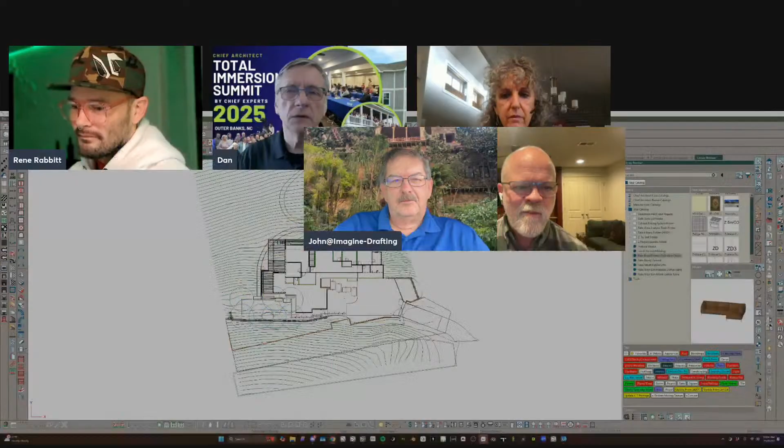There's a win, and that's it. He's really, the ROI he got from that summit was phenomenal. So Doug, if you're on the call, congratulations, and look forward to seeing you again because you're going to be there again this year.

That's still fabulous. We communicate with a lot of the people that we meet too. I mean, the networking part can't be undersold. It's awesome. You get to know like-minded people.

I'm actually doing a project in Connecticut and Laura is helping me. Laura Devlin lives in Boston. She has a cabinet line and she's going to help me on a project in Connecticut, which is really fabulous. There's plenty of room for everybody, it's fun to collaborate. I love collaborative design.

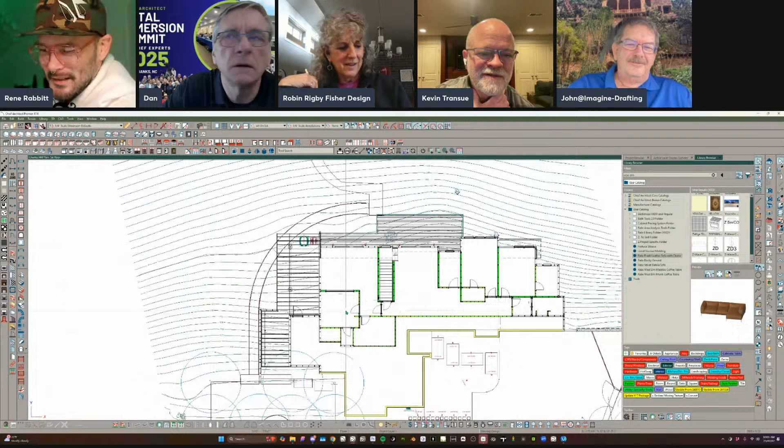Speaking of design, look at this disaster. I can't even see, this is awful. I think it's mine. I think I'm very sensitive nowadays to too many lines on the screen, which is ironic considering my toolbars are ridiculous. But yeah, I can't even see when I see something like this.

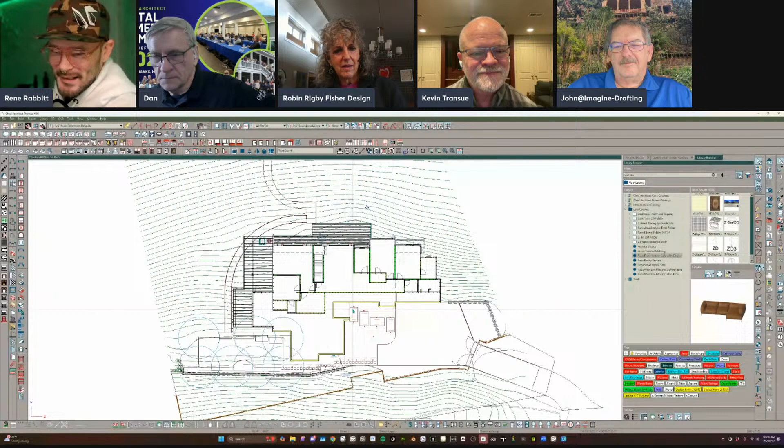This was something that was done back in 2013, and we needed some plans to do some plan review today. I figured, okay, let me go dig up an old project. If I open this up, I'd be like, oh, all right, price just went up. This looks like a pain in the butt to manage.

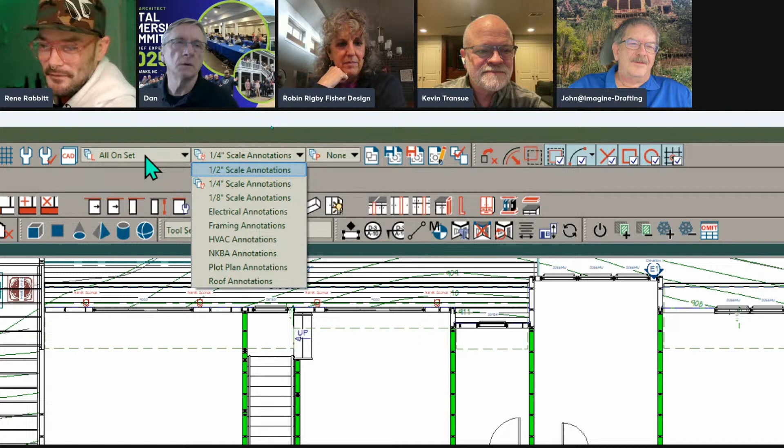Clearly, it's still probably more amazing than I think. It's actually pretty blasted on the interior side. We can see that this was before saved plan views were ever introduced, but we did have annotations, and back then I did not know how to modify my annotation sets, which are now default sets. So this wouldn't even be the right name.

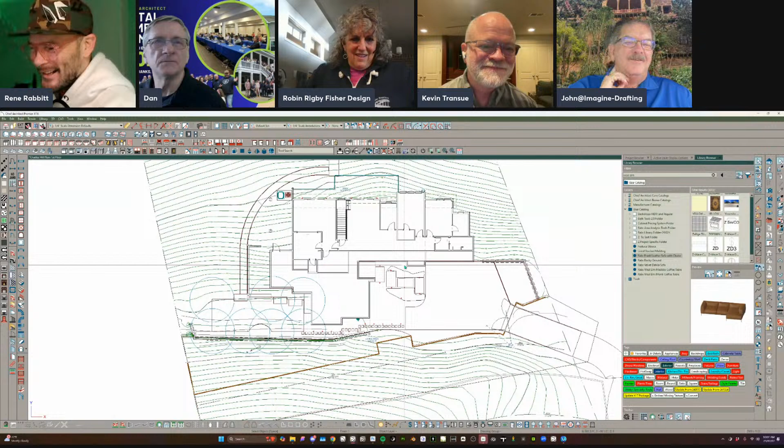Oh my, it just goes to show we've all started from various backgrounds as well. Wow, junior looking setup here. Let's see if just the default set shows anything decent. No, the default set just looks like the all-on set. So it's not great, this is so bad, in fact, that my first thought would be, let me take this and bring it into my current template plan, right?

Yeah, absolutely, that's my first thought. I'll show you how to do that because it's pretty quick. Now, transferring to my template plan is a little more challenging because I got a lot of stuff happening behind the scenes, so that's more challenging. Probably not going to get into that, but I'm going to use the edit area tool and get this all lined up. Something I like is I like to know on my template, whatever template you're using, I want to know what the center of the drawing sheet is, because if I'm going to transfer something to this template, I want to move my base model to the center of where my drawing is going to be on my new one. There's a very specific reason why, and I'll show you.

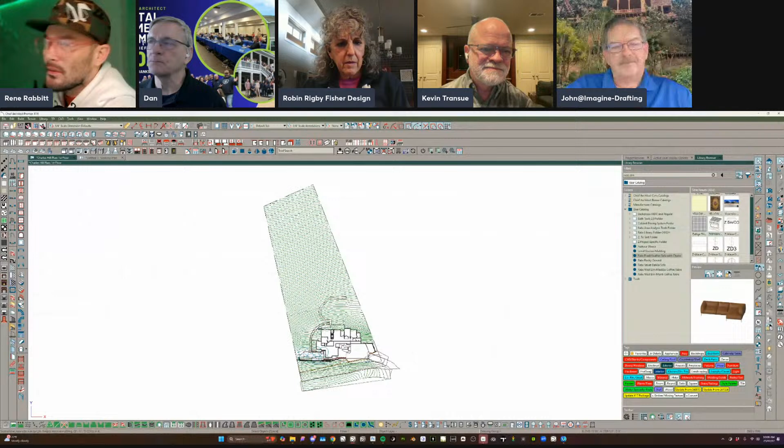We'll just do a little test of this. I'm going to use the edit area tool, which is in your edit menu dropdown, edit area. I'm going to do all visible — no, I'm going to do just edit area. We've gone over this before, but all visible just means anything that's visible on the screen, what layers are turned on, everything visible on just that floor. Edit area, all floors, makes sure that we're just grabbing every single floor, everything we've got, and edit area all floors visible. Edit area is just your current floor. So I'm going to do edit area, all floors, and grab this guy.

This will pop up and it'll take a second because this actually has a lot going on in it. I'm going to do — what the heck is this? I've never seen this before. Allowed angles, have you ever seen that before? I've never seen that. I learn stuff in Chief every day. What is that? What is it? I have no idea. Allowed angles? Oh, angles, I know what it is — you get to set your increments.

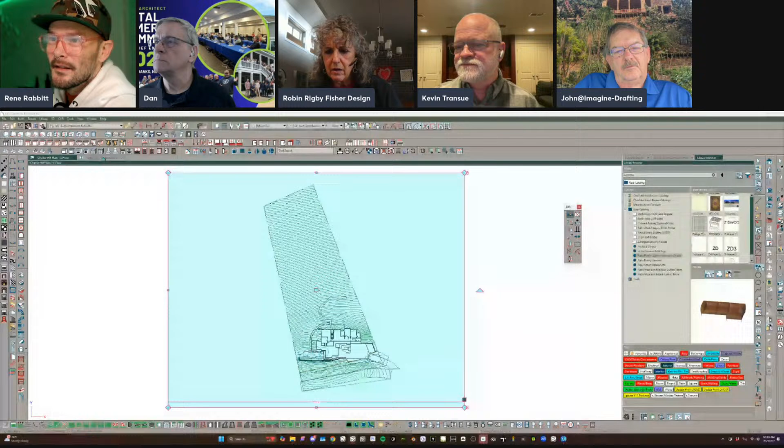So I'm using edit area. I'm going to grab this - again, it's got a lot going on here so it's going to lag a little bit. And then I'm going to copy paste, and I'm going to come back over to my template as soon as it's done copying. I guess I could have picked a project that didn't have so much of whatever is slowing it down. There it goes.

And then I'm going to paste hold position. Now you could click place, that's a way of doing this as well. My main problem with paste hold position - I like to paste hold position so that if for some reason I needed to modify the source plan, if I copy that modification over and paste hold, I know it will get pasted in the correct place.

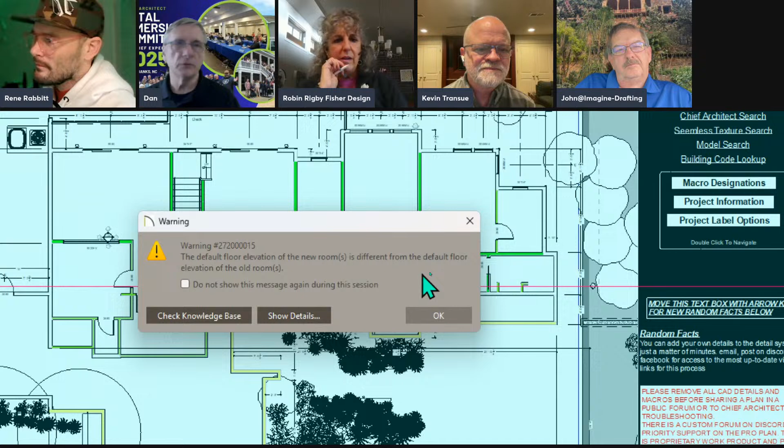A lot of times I'll mark something on my new plan that I'm going to work in and put it over in the other plan, like mark the center. Then I'll move that plan to the center. Then I'll do that edit area copy paste to the new plan. That way they're both in the same synced location. And if you do have to copy or move something from the plan again, it's there.

It's nice. I want to note this warning: default floor elevation of the new room is different from the default floor elevation in this template plan. That's important to note because, hey, let's do gang mentality - if everybody watching this went and sent in suggestions that Chief should make a way to automatically import the default floor elevations, they might do that for us. We've been asking for it for a decade. It would be kind of nice.

I have a question - is it going to change the heights of your rooms in there, or is it just the default? It will change the default height of your floor. But any existing room that's set to use default will take on the new default that's in the template, right?

So I always - essentially ruining your project - what I always do for the plan I'm copying it to is create the same number of floors as the existing plan and set my defaults to be what they need to be to match that. And then I'll copy it over. That tends to eliminate some of the issues, but you'll probably still get that pop up.

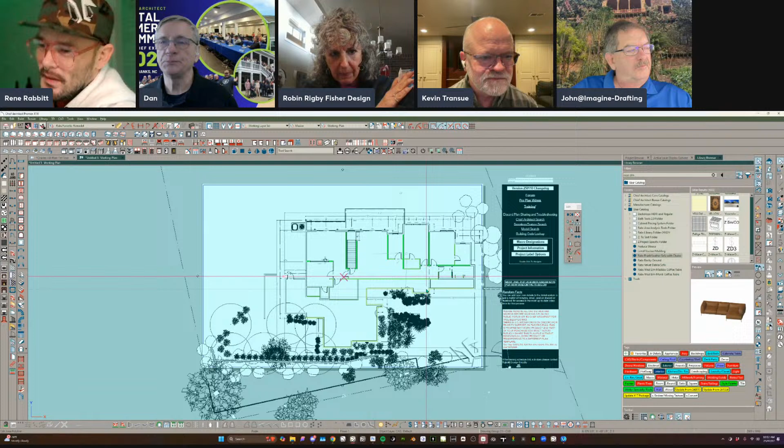So let me ask a question on this - the reason why you're moving it to a new layout is because your plan was in X13 and now you want to do it in X16, because you can't just bring your layer sets and your saved plan views into X13. No, saved plan views and layer sets and everything is specifically what I want to inherit. That's why you're moving it - you're copying it into a more current version instead of just editing in the same existing version.

Okay, and so now that this is pasted and I get an edit handle, I actually want this project really centered on the drawing sheet. So if I were to take this and move it now, here's where something is kind of funny with Chief - this edit area isn't just moving the plan I just pasted, which is typical of anything that we copy paste in Chief. It also grabbed any other element that was in my existing template and moved it as well. Notice my sidebar just moved when I moved this whole thing. It moved all my elevation cameras, it moved everything that was already in my template plan with it.

And that's not something I wanted, I just wanted to move just the project.

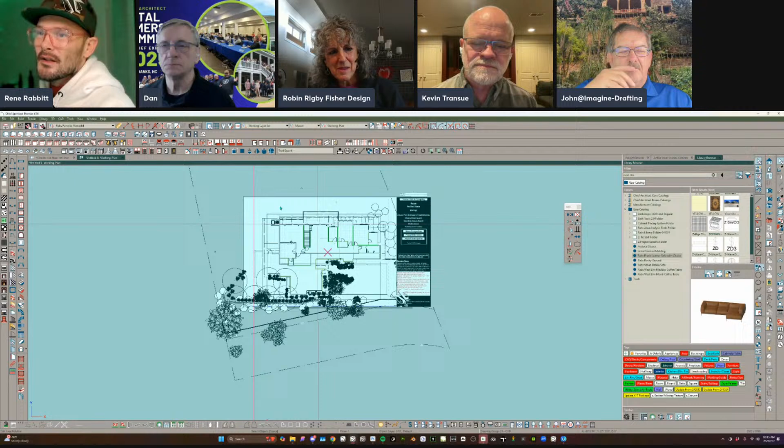So that's why I use edit area beforehand and choose to move it in the source file first. I want to know exactly where my template is set up, the center of the screen, and we could figure that out real quick.

If I just turn on my drawing sheet, here's one way of doing it: I'm just drawing a line and picking up the coordinates by hovering over this. I could place a point, or just look down at the bottom of my screen, which will show me my XY coordinates down here. That way I can figure out what the center of my drawing sheet is.

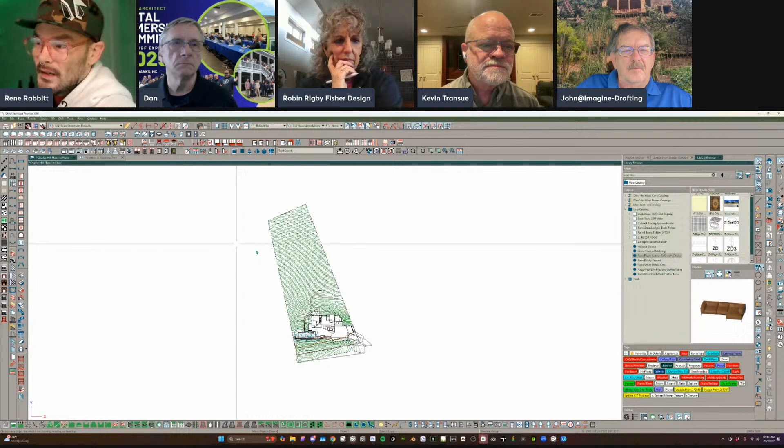Once I know that, I could come back into the source plan, go into the CAD menu, go into points, and place or input a point. If I input a point, that brings up a dialog box where I get to say I want a point at 0,0 absolute location. That happens to be the center of my drawing sheet. Now I've got this point placed.

Now I've got something to reference when I use edit area so I can move this over. Edit area, all floors, so you get the foundation, first floor, second floor — you get everything in the plan.

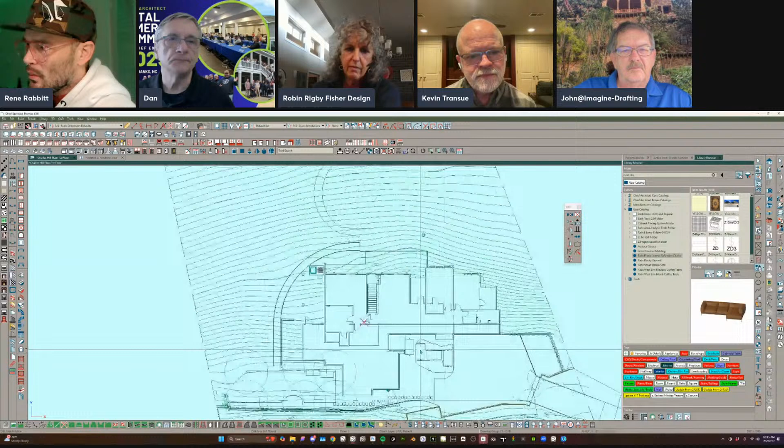Here's the next part, since we're going to have to wait for this to load up anyway. Oh, actually that worked pretty well. With this selection we get a little bit of a point-to-point, so I want this section right here to be the center of the drawing sheet. I'm just going to do a point-to-point, bam to bam. Look at that, done.

Now, before I copy this over, I'm skipping one thing that's really important: I need to go to my template plan and turn off a couple things that are on. One is I need to turn off auto build.

Let's point out that when you selected everything, it did not select the X that you put in the center. Yes, the X stayed the same — it's not selected.

I do want to show something about that point input, because that's a really cool one that people don't know about sometimes. In my template plan I have auto build roofs on and auto build foundations on.

Well, the plan I'm transferring over has custom foundations and custom roofs. So what happens when we use edit area, paste it into your new template plan, and auto build foundations and roofs are on? A nightmare — it rebuilds everything. All of a sudden you've lost your roofs, you've lost your foundation. You might not even know about it until you go print it and realize, oh shoot, I've got a big problem.

Even Dan would be using different words — I wouldn't say oh shoot or oh darn.

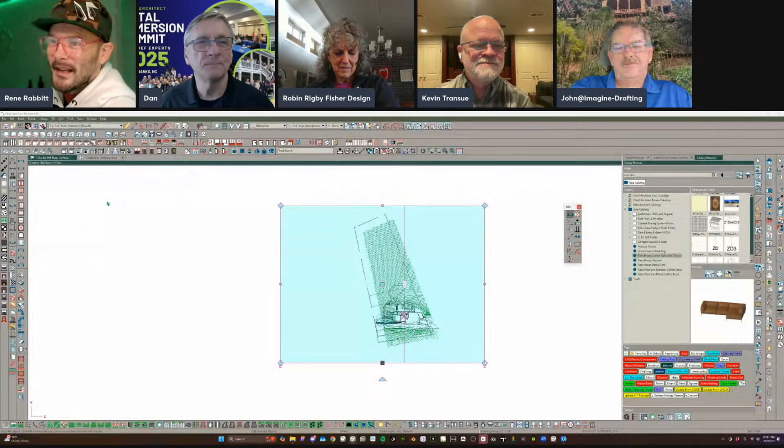Now, one more thing I don't love about this: I might be bringing in a bunch of custom layers that I had in the old plan. You could just ignore that, or take the time to revert everything back to its default layers — only if they were used in what you're copying and pasting. You're not bringing the whole layer list.

That's how I do it when I bring a DWG into a plan — I never bring it into the plan I'm working on. I put it in a different one, then edit and turn off what I don't want. Then I copy and paste with edit area, like you're doing, into the plan I'm working on, so I only get the layers that are showing on the screen.

Boy, this plan does not want to paste. There it goes — there's my biggie there.

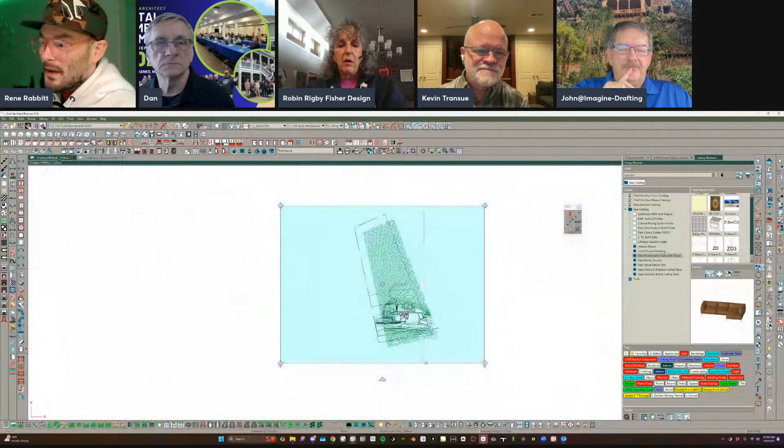So here's the next part, figuring out what that floor default is. Now I have the button on my toolbar for floor defaults, it looks like this guy over here. But you can always get in from default settings into floor and rooms, then floor levels. This is where I'm going to figure out what's my existing first floor.

I love doing it this way, I just love taking a little screen clipping. It's a little time consuming, a little bit annoying, but I'll come over on this side, get to a blank area just off to the side here, and paste it.

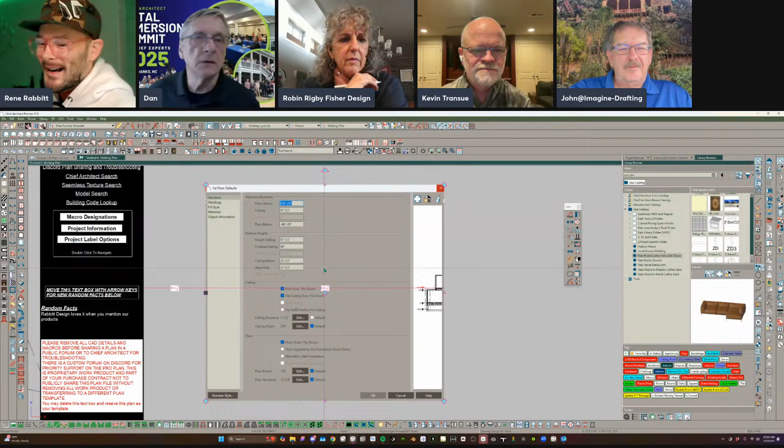Did you ever use the Chief Capture utility? I don't, I know you do and you're really good with it. Yeah, it's phenomenal. The nice thing about it is when you do the capture, it's there, done. You don't have to copy paste it anywhere.

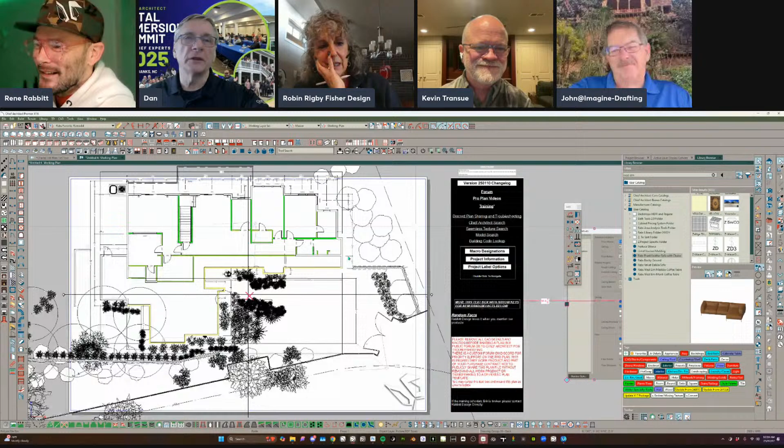So anyway, we need to talk to Chief, we need to push them to make it so you can capture your dialog boxes, because you can't do that with Chief Capture. It'd be great if you could just capture all the actual inputs and paste them. I couldn't have done what you just did with the dialog box, because I couldn't get to the copy command with the dialog box open.

Notice my plan is chunking all over the place, right? It's glitching, just moving very slow. And I have a very fast computer, arguably one of the fastest. So what's happening here? It's because of all the vector lines being produced from these plants.

Part of the reason I have a particular tool on my toolbar is for this. It makes it really easy for me to hide a layer to improve the speed of my plan, which is why I have this right on my toolbar. Layer hider. When I show people that, they go 'Oh, cool!' It's one of Dan's favorites, definitely one of your people's favorites too.

So I just want to get rid of these plants, and all of a sudden, look at that - I'm fast again. And so I've got my first floor defaults.

I'm going to go set those up. I'm going to match exactly what I've got going on here. I just like to have this as a reference right on the sheet. Super easy - you know, boy, it's only off a quarter of an inch. I don't even think I want to show you.

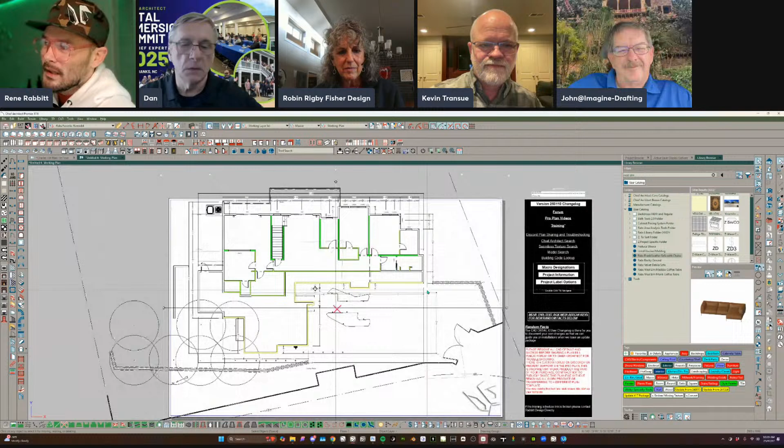And then from here, it's just a little bit of cleanup and conforming this to my existing plan sets. Hopefully, after a little bit of work, I'm getting to something that looks pretty good. By the way, let's go look at this thing - I don't even know what this might look like.

You got to do one thing before you can see the terrain. Oh, build it? No, when you do the copy and paste of terrain from another plan - oh, you're right, it doesn't copy the terrain perimeter. You have to go turn that back on and then set the height.

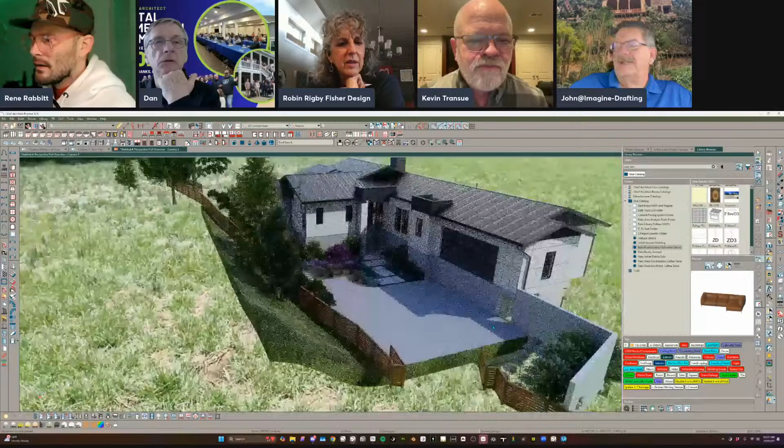Well actually, is that the same terrain perimeter thing if you copy it from floor to floor too? Is it the terrain perimeter? It's maybe doing all of it, not all the settings. So what were you saying again about that? Go back to the floor plan and click on the terrain perimeter.

Wow, Rene's learning something today. This is so cool. Well, you should have known this. Rene knew this. Oh, so I had a terrain perimeter.

I need to go grab it. And it looks like - I don't know, is it offset, add line? It would have copied the line, but it doesn't copy the setting that it's a terrain perimeter. So you got to go turn that back on. I already had that one, right? Yeah, it should be in there if you go turn everything on.

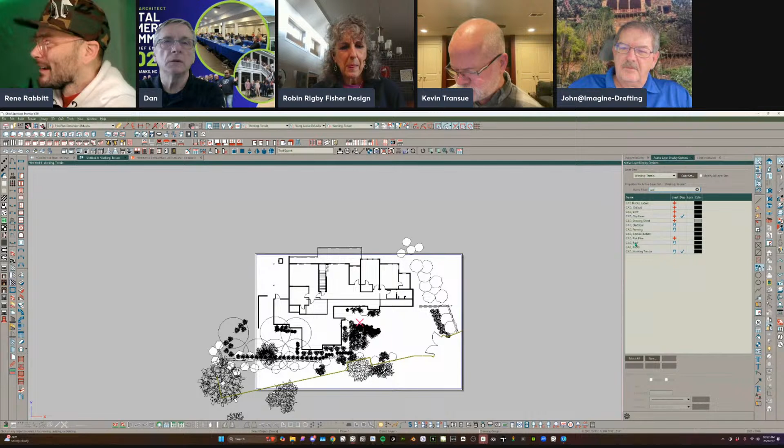It's on all of the contour lines for all of the different elements, they will keep their settings.

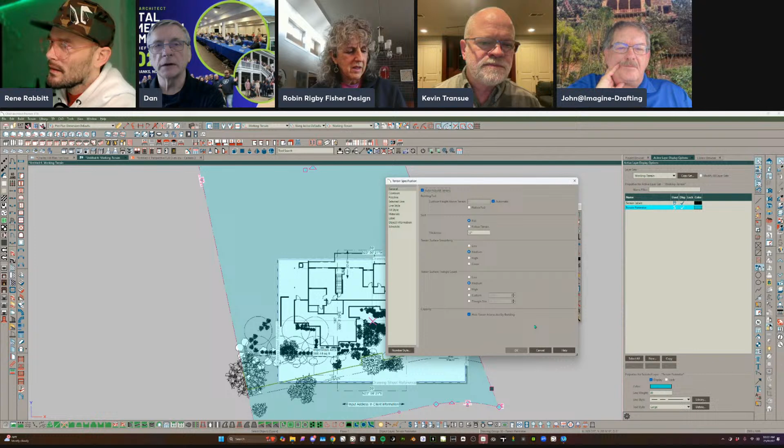So you just have to reactivate the terrain perimeter. If you open the dialog for that, I'm just guessing this line now. So now I'm going to convert this into terrain perimeter, and I had to delete my existing terrain perimeter to even get this option. Then you might have to set the height of it again, right there under uncheck automatic, if it had a height.

Which, if we're looking at this correctly, I don't even see a terrain perimeter in here. Who knows? There it is. Oh, that's one of those points that's confusing even among us, even your terminology or what you had to do.

Why don't you go back through that again about the things that do copy and don't copy when you're doing the edit areas, and then what you're really doing to correct the terrain perimeter. Is your terrain perimeter turned on in that layer set, Rene? Oh, look there, it is, that thing way down there.

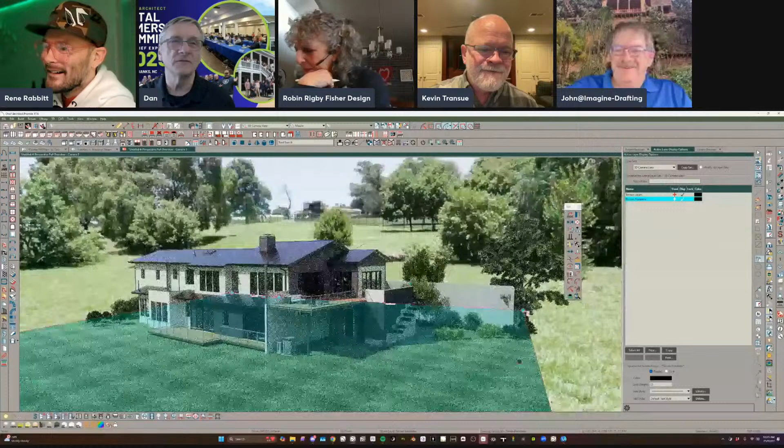I do a lot of terrains, and I love the sea level functionality where we can set it by sea level. But look, all my topo lines didn't come through either. They should have. Maybe go try rebuilding terrain, see if that does anything, because maybe auto rebuild is turned off.

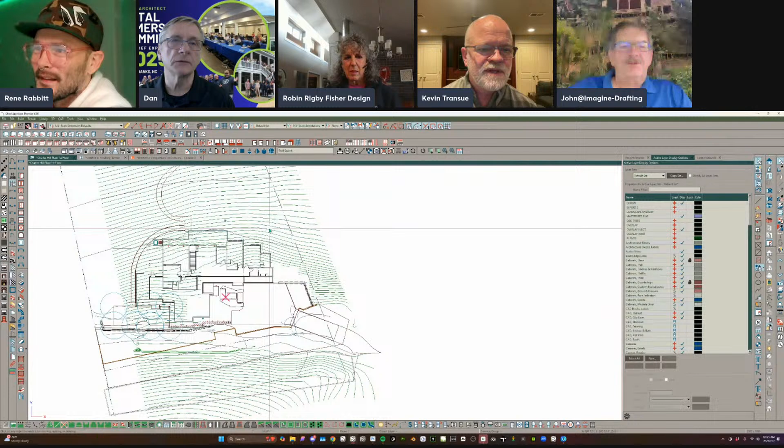Let's see, auto rebuild from the original. No, just go to your terrain tools and turn on rebuild terrain. Yeah, it should have grabbed all this elevation data. It should all be there, it keeps that. Just go rebuild terrain, yeah, it should be auto generating.

Let's see, where is it? It's this guy. If you double click on the terrain perimeter, it's not auto built. It's not doing it. Oh, there's something goofy, and it has none of the elevation contours.

Did it have it at the time? Yeah. Is it on the same floor as it was before? Doesn't look like the terrain perimeter is lining up with the terrain contour line.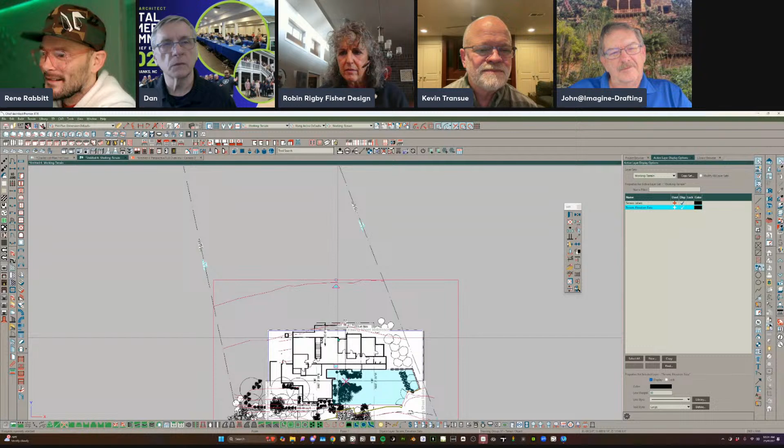All right, let's try this, see if I can't copy these over. Well, now they're in the wrong place. Maybe those didn't copy. I usually have that stuff turned on.

Hey, there's a little bit of magic. Now I just got to set there you go.

All right, boy, we're getting stuck in the weeds on this one. Yes, we are. That's the joy of plan review.

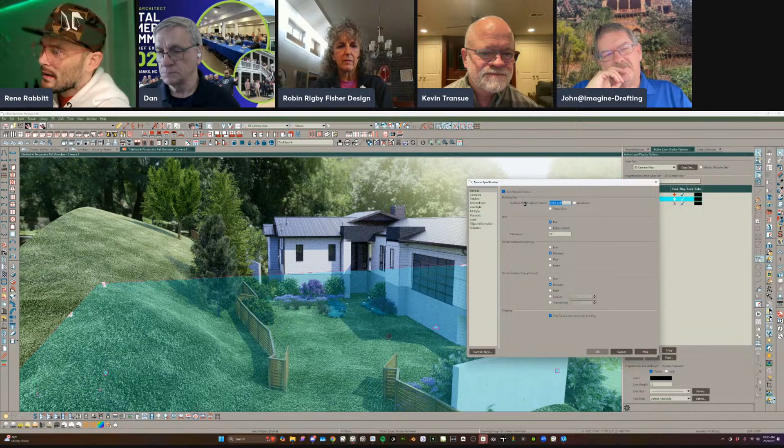Yeah, but bottom line, here's a really important note, because this can get super confusing to people. Notice that this terrain right now is not up to my garage level. It's being set by some kind of median, is how Chief described it, like a median range of where your floor levels are set. So right now, if I uncheck automatic, and let's just say that subfloor height above terrain is 0 inches, let's see what it sets based on.

It's going to set based on that lower, wherever my 0 is on the floor that you have it on. Which, that's interesting, where'd it go? I don't even see it. Yeah, this is going to be a good show.

Let's undo that a little bit. Sometimes the joy of doing this, opening old plans, is you have to spend time figuring out all the things that are wrong, and that takes time. Once you get them straightened out, then it usually goes pretty smooth.

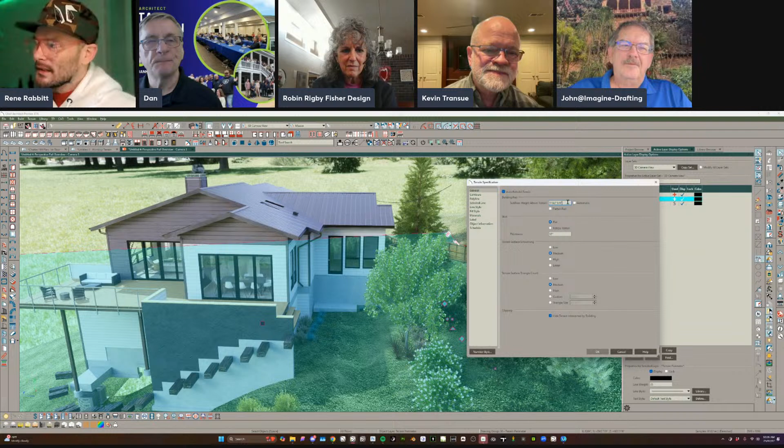Subfloor height, well, I guess I'll go a little bit. I want this to raise up. And if this number is true, that's the actual number for whatever reason, then if I want to raise it up, this is the subfloor's height above the terrain. So if I want to shrink that height, I'm actually going to decrease this number, and it looks like I'm going to decrease it by about 8 feet or something. Let's see if that works.

Again, that number, thank you, Mike. That Mike number is right. What did Mike say? Mike said creating, breaking, and fixing problems are the best kinds of episode. Yes, so we're here for you, Mike.

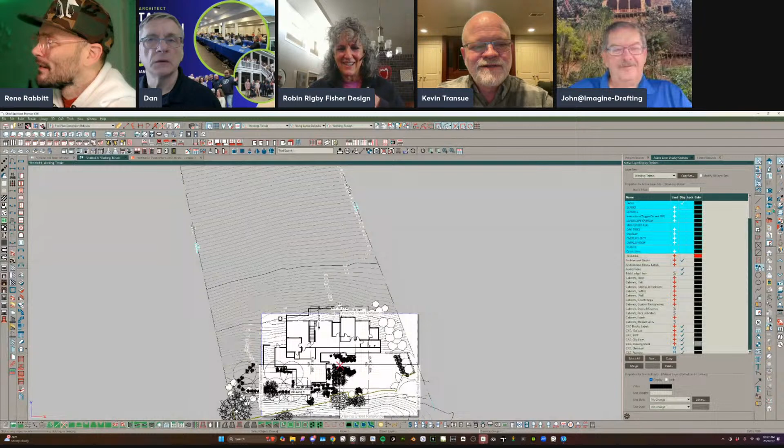Terrain should be easier than this. Agreed, Chad. Life should be easier than this. But you're right, Chad, if we go look at the original terrain, this was a complex terrain to build.

I remember that. So Alan, Rene's computer is like out of this world. It doesn't even look like a computer. Seriously, it does not even look like a computer.

But it's fast, crazy PBR. You guys want fast PBR? I'll show you the old settings that I had in here, which is way too high on the sample rate. I'm going to kick this down to like 50.

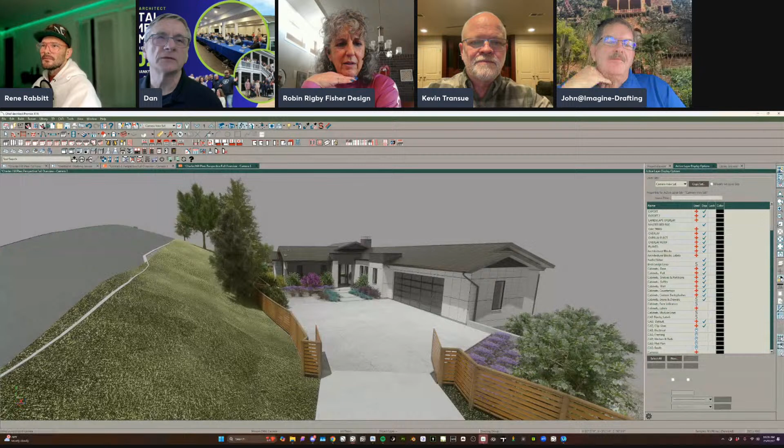Show everybody how you got to that menu, Rene. This is your rendering technique options. If you're on the default toolbars - you don't have a couple of these extra toolbars - it's rendering technique options. It's a little house that's blue, has a blue roof, and it's a white building. No, it's your little rendering icon that looks like a page with a pencil on it. You can also get to it through rendering technique options, not edit. I'm showing how you got to the menu where you're changing that number. Yeah, that's rendering technique options, not the edit view. And for some reason my default toolbars don't have it.

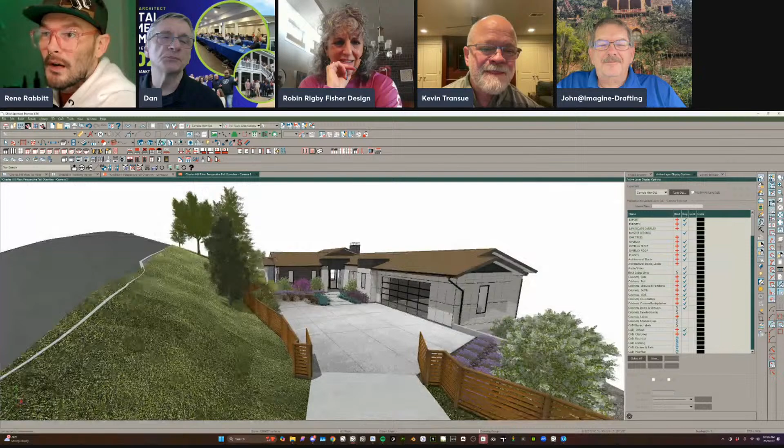It should look like... where are we at with this? Oh, here we go. So you can always double click whatever active tool is here, and it will bring you to rendering technique options, in case you didn't know that. It doesn't matter what rendering option you're on currently - if you double click that, it will bring you to rendering technique options where you could switch. It's a fun place to spend a lot of time. Double click whatever your rendering is in right now. Just click on the option I'm in - standard. If I'm in a standard rendering and I double click this, it'll bring up rendering technique options over here. There you go, cool.

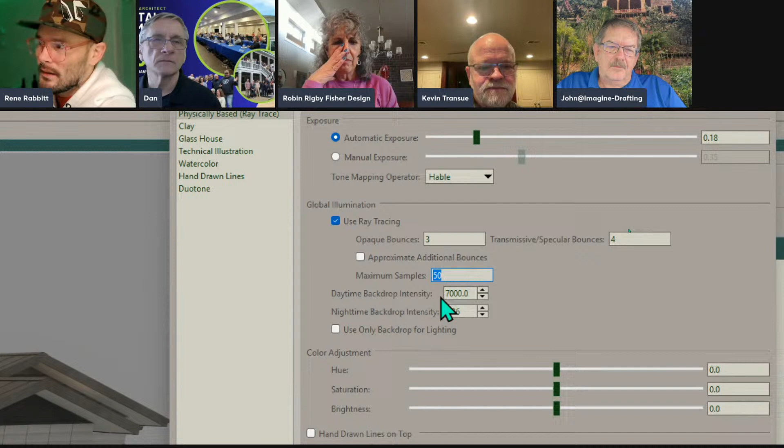I'm going to switch to physically based. This is a good base number out of the box, something like that. My new standard is that I do have sun on, and I do use a backdrop. My backdrops, the ones I use, are usually better around 15,000. If you really have a slow machine and want it to be a little faster, set this to 2, set this to 2 - that'll speed you up a little bit. If you've got a super slow machine, set those to 1 and keep your maximum samples down.

If you have a slow machine, I would tell you to edit the active view, and under AMD FidelityFX, which is in the camera panel, you could tank this down to quality, balanced, or performance. If you've got a Mac M1 chip, which does ray tracing very, very slowly, you're going to want to limit the resolution of your window - shrink that window down - and turn on this performance setting. You're going to set your samples really low, and set your bounces to 1 and 1 if you've got a Mac M1.

All right, so I'm going to keep this on native resolution.

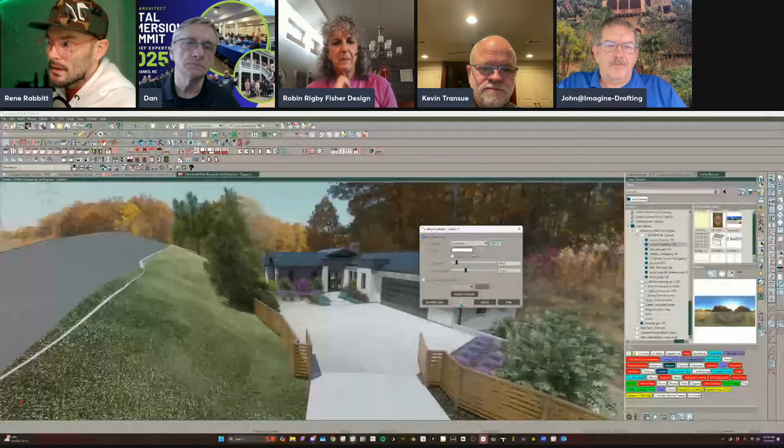And then I personally like to process stuff in AI after I've rendered. So I'm kicking this to something like 10,000 sun, which is going to turn that way down. And then I'll rotate it around to just create a little bit of shadows, and rotate that backdrop. I also like to underexpose my stuff because I'm using AI to kind of fix some of that as well.

So what program do you use to fix up your photos? I just paid for something called Krea AI, so I've been using that. The main thing about it though is that you need a rendering that already looks good, so you do have to spend the time to get there, and then from there you can get some pretty fantastic shots. I could screenshot this right now and probably get a pretty good output from it.

Yeah, just do it real quick. Well, if you turn your sample rates up, that'll clean it up a little bit too, won't it? It will, but for the AI-based side of this stuff, I don't even need that. I'm going to do more work.

I'm going to do more work on top of this in Photoshop when I'm done. But first, I'll bring this to Krea.ai and click into the enhancer to find that screenshot I just took. Notice I didn't even bother exporting the image or upping its resolution, because it's going to upscale it here. So in Krea.ai, I'm going to increase the strength.

Is it just CREA, Rene? Yeah, KREA.ai. I'm not going to go too far into this because it's something I've covered on my channel, but I do have some videos on this on YouTube. We'll see what happens to this in just a minute.

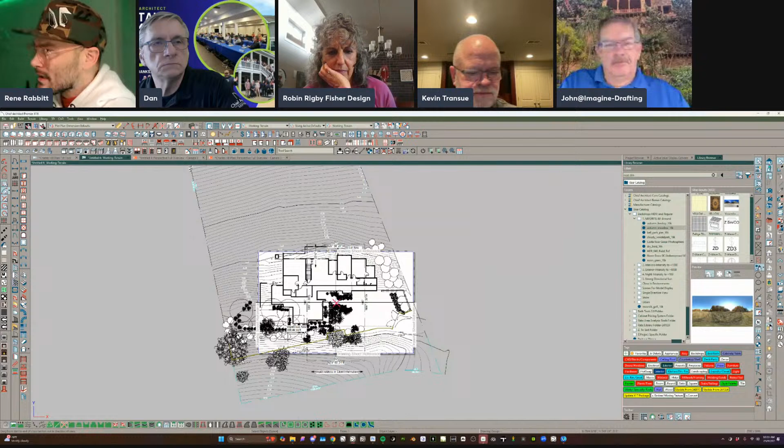Anyways, it's clear I have all this landscaping, and now I have to go transfer this or get that terrain in the right area on this other plan, because we don't have any of that on this other plan. So a trick I like to use to correct this is pull an elevation camera, and use a line to measure what my offset needs to be. It's clear my terrain is too high by this amount.

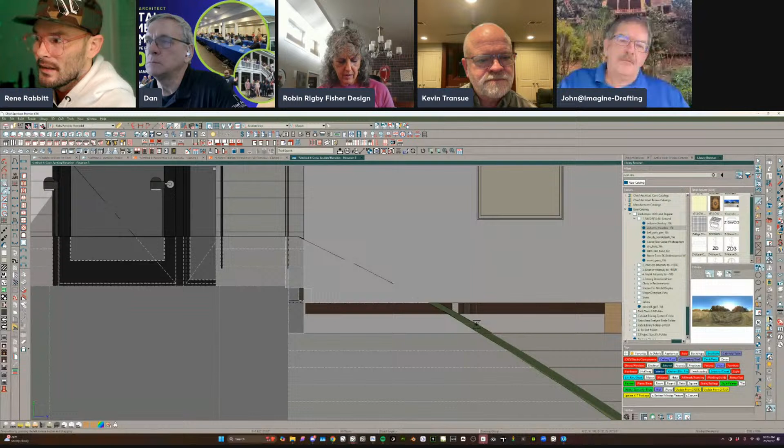Yeah, so there's my terrain right there. I pull a line, bring it down, hit tab or enter, and it's going to tell me I need to drop my terrain 17.5 inches. I should be able to select my terrain right here. I know that I did, even though it didn't give me any feedback, because my edit toolbar is indicating it's picking up terrain.

And I can just say, let's see, subfloor height above terrain - this always confuses me. I want to shrink that height. No, I want to increase that height. So this time I'm adding 17. Yep, that should drop that down to the floor level.

In fact, it looks like I even needed to drop it down a little bit lower. Typically I always set that level at basically my garage floor height, just as a rule of thumb. There's no hardcore specific rule, you just got to get it in the right place. I always start with the garage floor.

AMD setting must be specific to the operating system. There's a similar setting for NVIDIA. Nope, that is just - why am I going to forget this term - shader. That's just who built the shader. It's just called AMD FidelityFX. It's not specific to AMD, so you can still use it on an NVIDIA-based machine.

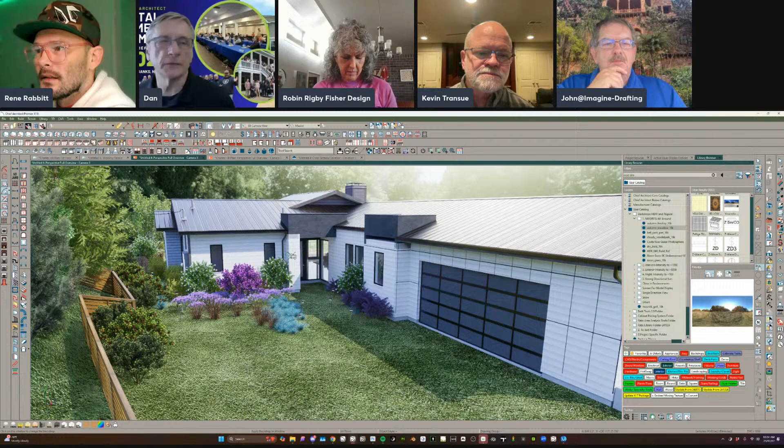Boy, all kinds of problems in this plan. Look at this. Well, let's not worry about that stuff right now. It's one of those things - when you focus in on what the problems are, you'll figure them out. We don't have time in a show like this.

So you just bring in that image that you've done? You just copy paste the image? You screen capture and paste it into the app? It usually takes anywhere from 2 to 10 minutes to work some things out. So you can't just do a screen capture and paste - you have to save it as a file and then upload it. Yes, I've never tried that.

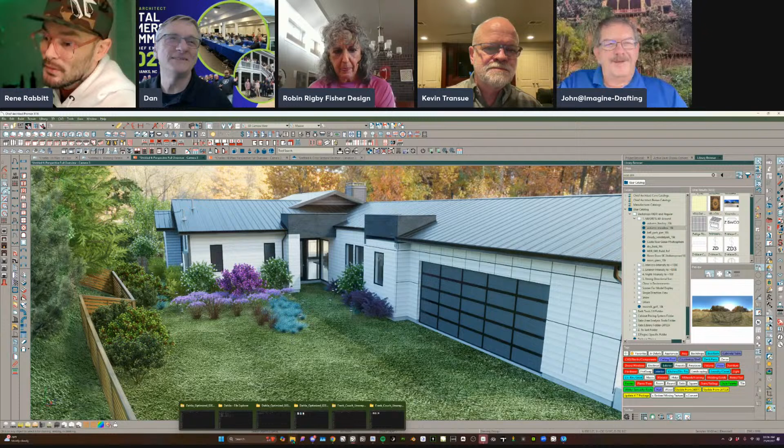We talk about file and folder organization. I'm on a PC, and I changed something that Windows warned me about, but I've never had any regrets about this - when you use the screen capture tool, same as hitting Print Screen or Windows Shift S, by default it sends it to your My Pictures folder under a folder called Screenshots. On Chrome, we have a default downloads folder in Windows, which is under Documents, Downloads. I had to do a registry edit to change the default location of where my screenshots go, to downloads. So when I take a screenshot or download something, it all goes to downloads, and downloads is something I don't care about deleting over time.

No matter what, I'm always just going to the same place for whatever I'm downloading or screen capping. Of course, I use Snagit, and Snagit stores it in its own program library, and then you can do a save as into any folder you want. So that's what I use for most of my captures - just another way to do it. Tons of ways to do it.

Yeah, is that true? Let me think.

What do you got? You want to share your screen? No, that's all right, go ahead. I was just seeing if the print screen button allowed you to save it separately, but it doesn't.

It allows you to capture just part of the screen now, which it never used to. Here's our before and after. I love those sliders like that.

Always nice. There's some things it did really well, and then other things where you notice it's putting a lot of texture on this. That's got to cue you in to go back into your model and remove something that's got heavy texture so that it performs better. So it does take a little back and forth.

What's great here is it did a wonderful job with a lot of the plants and stuff, right? I can download this and come into my Photoshop, which, to me, you're a rendering artist, you always need Photoshop.

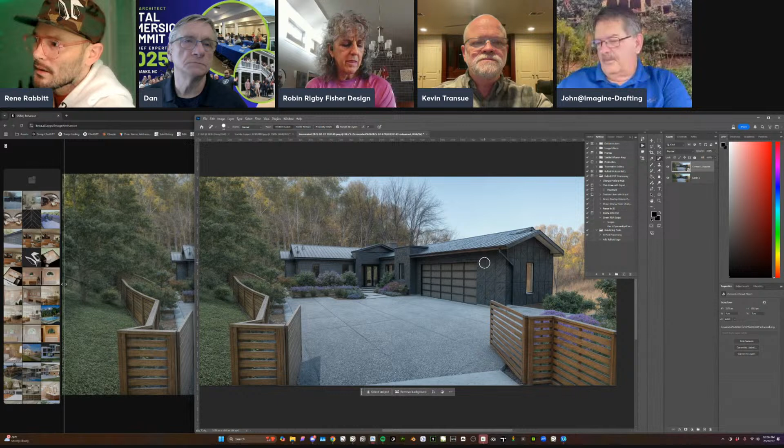So this is my source image, and then I get to drag on the new image. If I wanted to, in Photoshop, we have something called a mask, where you're just masking off part to reveal a layer underneath, done by a brush. So I added a mask. I can mask out the non-textured part of the original to get the parts underneath to show so that this looks a little bit better, right?

So this is the kind of stuff I am going to go over when we're working through this.

Rene is a certified, qualified expert in Photoshop, and if you have any questions about Photoshop, he's the guy you want to talk to. That's why he's so heavy into images. You spent quite a few years studying and doing image work, didn't you, Rene? Yeah, I've been in Photoshop since I was 13 years old.

Yep, and look at that. That looks pretty good, why not? It looks like a painting. Nice, yeah, pretty cool. That is cool. Well done, go sell it.

Now, did you finish the process of moving the project into the new plan? No. Okay, just bringing you back. No, that's cool. I want to know where all my landscape features are.

They must be on a layer that I don't have turned on. I would assume this is where I might turn on all layers and check what's going on and see if it's there. If it's not there, then you know something's missing.

Terrain features - of course Rene had to pick out one of the toughest plans to do a copy into a template type of thing. Yeah, it's kind of an old standard I'm pulling up here somehow. It's funny the terrain features aren't showing up.

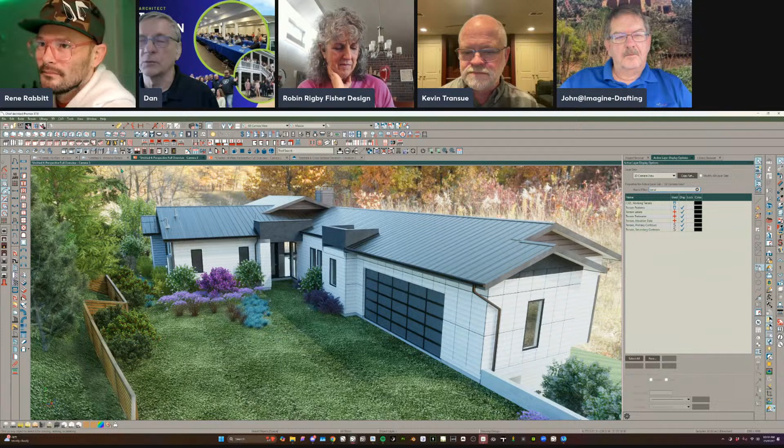Yeah, there's a little bit going on there. Yeah, I don't know, someone had some fun. This isn't showing those terrain features, so they didn't get copied.

So there's another case of, yeah, no idea why. It should have - you did all floors, but they didn't copy. You didn't use only visible layers, you used all layers. It should have copied them, I thought. Oh, go figure. Well, I just pasted both of them, let's see what happens, that'd be an example. Now you just turn everything off, there it is, except...

Okay, look at that. It did that. Copy it. All right, I just had to do it again.

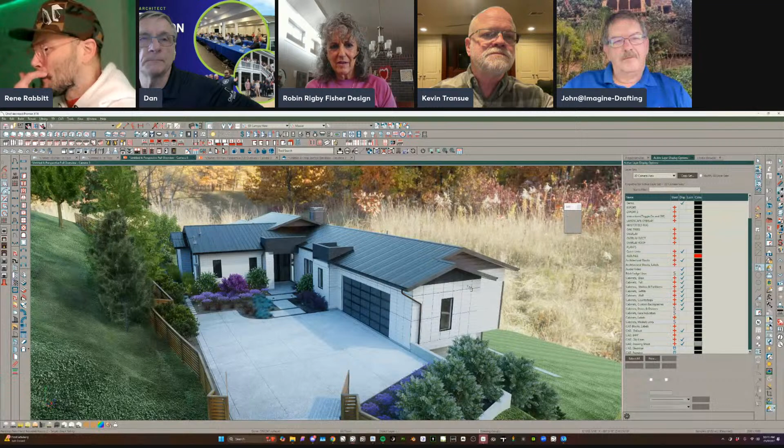Okay, so great case in point of why the paste hold position is powerful, if you've got your projects in the same coordinate space.

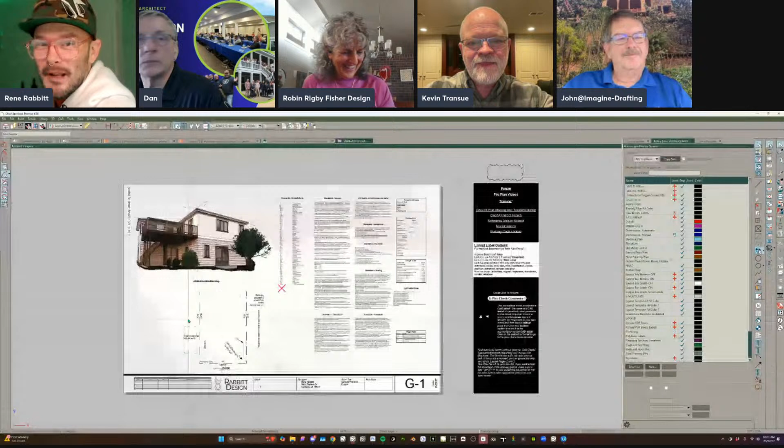One of the things you were going to talk about is how that mark you put at 0,0 doesn't show up on layout, it doesn't print. Oh yes, someone has to keep you on track, Rene. I went way off track already. I blame you. You mentioned rendering, I think. I didn't mention rendering, that was you. Come on, I heard you think it.

I'm going to bring up a particular plan that's already kind of set up, a great use case for these points. Let me ask, why is it so important to have your plan at 0,0? Is it just so you can move things around and use that point marker?

Historically, Chief does not perform well the farther you are away from 0,0. The farther away the model is from 0,0, they will even tell you to this day that's a troubleshooting thing to test first.

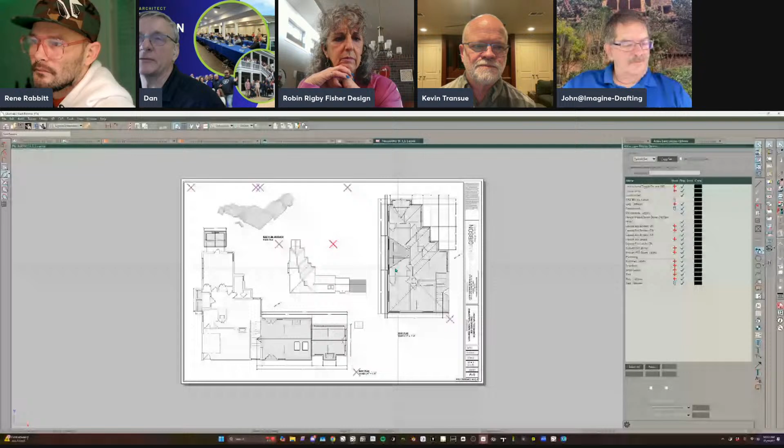Bottom line, Chief is a CAD program, and everything is calculated mathematically. If you move your plan way away from 0, when Chief recalculates all the math to build your 3D model or 2D drawing, the numbers are going to be a lot bigger. It's easier to go 10 times 10 versus 10,000 by 10,000.

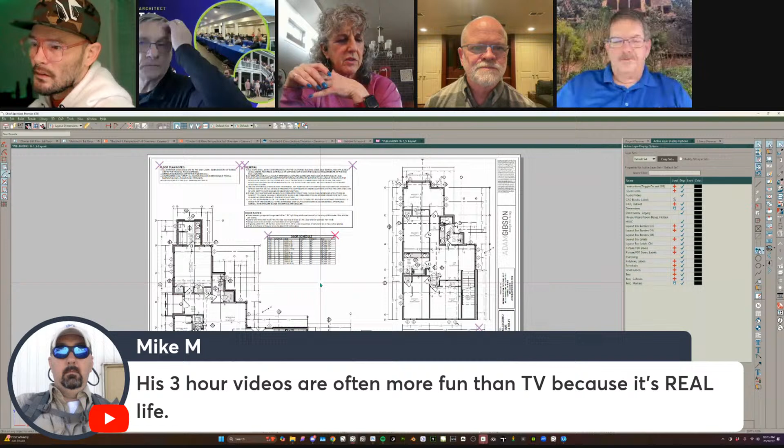So if you don't know how to find it, how do you find 0,0 on your plan? How do you get your plan, how do you find that point to mark your plan?

You'll have to pay closer attention than Robin did and go to CAD, points, input point. Then you can punch in an absolute location of 0,0. When I press OK, that placed a point at 0,0, which on this one happens to be way up here.

I want to note that the delete key, when you're not selecting anything, will remove the last point, whatever that point may be. Notice that the last point is highlighted amongst the other points.

This is what I use points for. Let me go ahead and hit the delete key. You're going to notice that one is now gone, and this one's now highlighted.

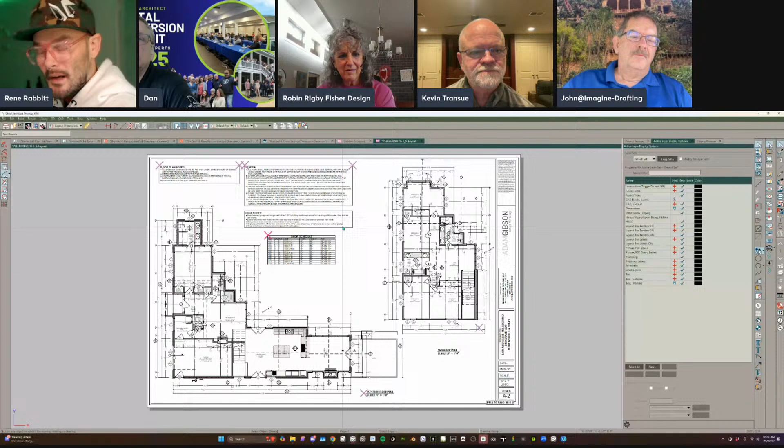I use points in layout because my key for this is sequential keys. We have hotkeys that are sequential, meaning I hit one key and right after that hit another key, and that could be a hotkey for something. So for me, place point is PP, and then I'm going to place a point here.

I want you to notice something. When I place it here and go to another page, it's on the next page as well. All points live on all pages and they don't print.

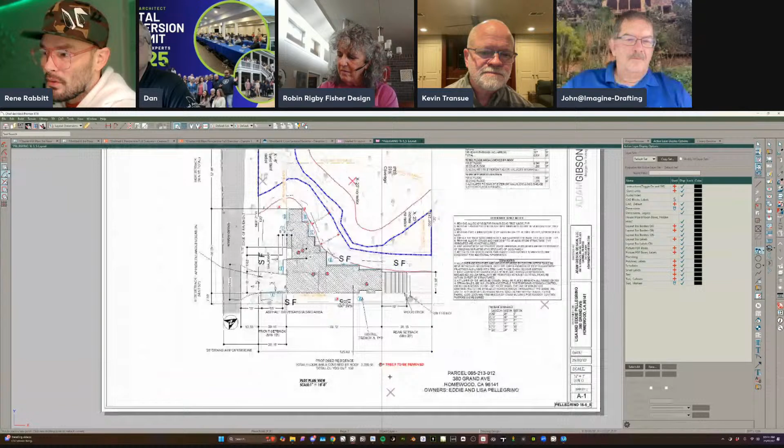This is a really great tool for aligning elements across your pages. I'm such a stickler about this, you'll notice this point down here across all my pages, I have my label lined up there on all pages. It doesn't matter what kind of view it is, I fight to get this.

You can see all these pages and it's going to line up. It's nice when you line things up. Yeah, my building lines up across all pages.

What's really great is I think a lot of us have taken someone else's plans and needed to trace over them, or had to scale a PDF. It's really nice to just scale a PDF one time, change the reference page, and have it still line up so you don't have to rescale the next page.

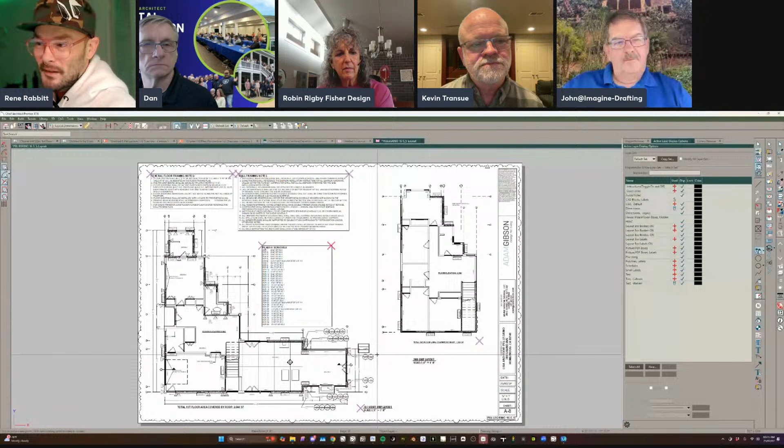Is this how you mark your elevations as well, like the floor elevation, putting a mark there so it always goes to that same point? I don't place based on points, although you can. I don't personally, but I'll show you a little trick and we'll do this in a brand new plan.

When I've got a building and I've got an elevation, and I want to line up from finished floor to finished floor, and this is the elevation I'm sending, let me just do a shift new. I'm going to do a new plan layout and get to a blank page.

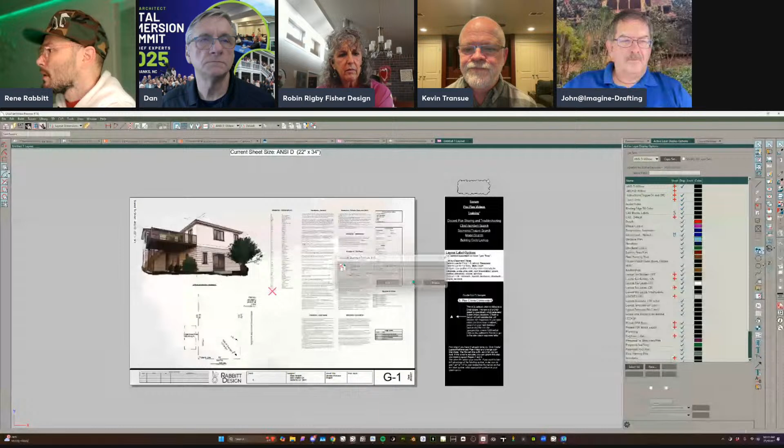I'm going to send this elevation to view, which I don't need to open to send it to view. We just do it from the edit toolbar, send camera elevation to view. You can group select those cameras too and send them.

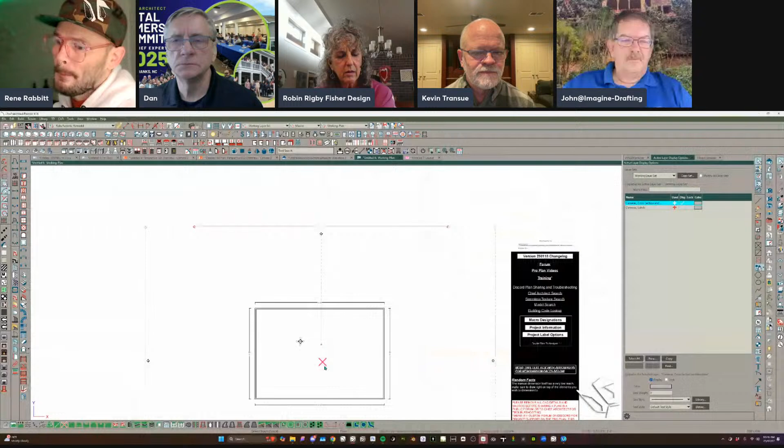Here's how I'll do it. I'm just going to move this guy up. I'm going to copy paste, drag out a copy. So I just made a copy, I hit the copy paste button, drag the center handle straight down. If you drag it with your left click, it will move orthogonally straight down. And then I'll relink this to a different elevation.

This is a really simple way to get these things going, right? And that's going to take. Since they added this relinking of views, it's just phenomenal. That's been great.

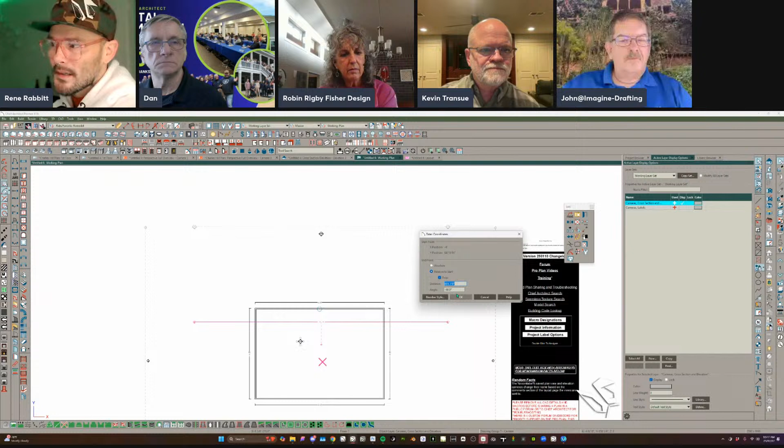In the method, even if you want a live view, I'd say just for a second switch to plot lines. And then what I'll do from here is I'll actually bring my camera down inside of the building, and then I'll hit tab or enter so I know exactly how far I moved this, so I can move it back some known dimension, 500.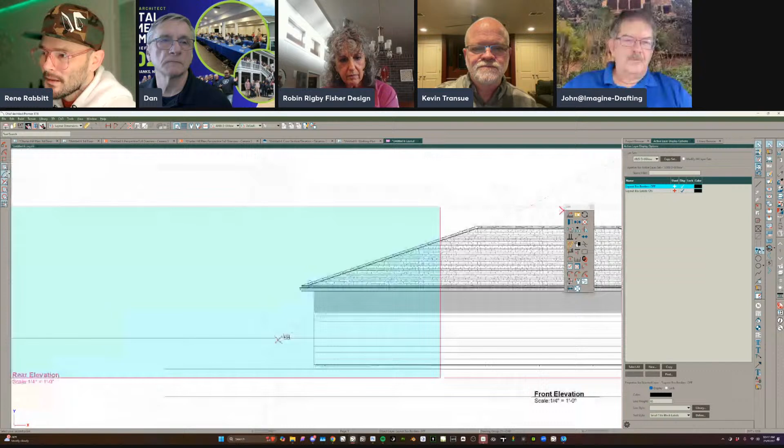Now when I go back to layout and I update this particular view, what's happening here is because we're sending as plot lines, these are now snappable points. So if I wanted to align this floor, I could do a point-to-point move, actually pick up the snap that's the finished floor level, and line it up with the finished snap of the floor level over here if I had it displayed. That way I've got my floors lined up side by side.

So just this, full circle. I could do the same thing here. I could bring this in, come back here, update this view. Say that I'm doing this side by side, I got a really big sheet size, so I can do that, right?

So I'm just selecting this little point to point, picking up a line that I know is lined up. There we go, that building is lined up side by side. I love that all of our areas are snappable on the layout pages now.

All right, let's move on. Hold on, Renee, I want to share one more thing. Okay, you got 1 minute. Yep, I want to move this back over. I'm going to right click.

That's not a computer minute. I'm going to hold my S key, it's not going to pick up any snaps. So now I'm truly just dragging this to the left. And then I move those elevations back and update the views. There you go, less than a minute.

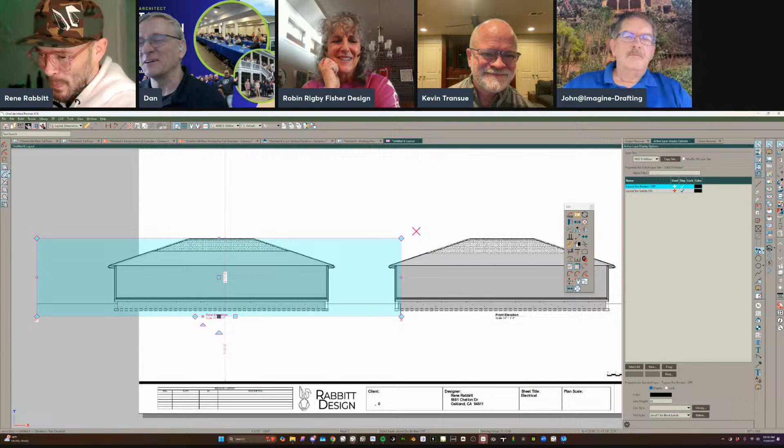Cool, all right, nice, you did it. Nice job, Renee, thank you. Good job on that. That's whenever you open up an old plan like that and look at it and go, oh my God, what am I in for?

That happens. So Robin, you had sent over a plan. And you guys, this is not a working drawing, it's just an example for my students. Let me bring Chief over onto the screen here. Yeah, there's no judgment here.

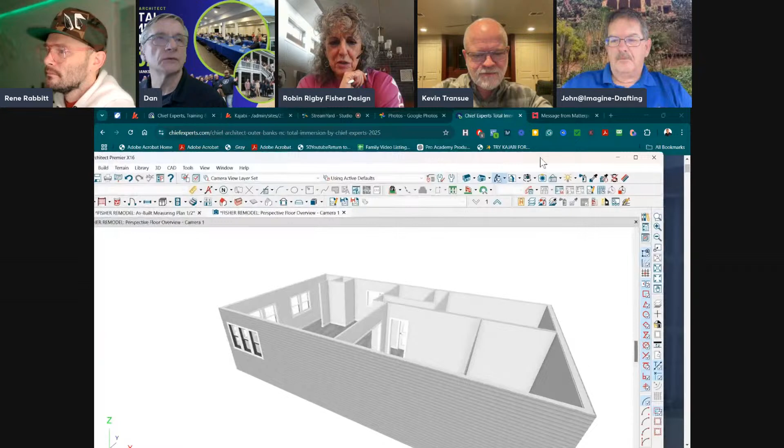You were starting to lay some things out. You had a question about something not showing up when you switched to view. We drew the house in 1/4 inch, and then when you go to the 1/2 inch framing plan, it disappears. Yes, so you go to 1/2 inch, that would be because...

I'll just say yes to that. That's because the plan has nothing in it related to framing. So when you turn your layers, when you put it at quarter, a framing plan is... hold on. When you put it at 1/4 inch plan, when you go back to 1/4 inch framing, it's there. Yeah, that's because the 1/4 inch framing plan is probably set up to display something different than the 1/2 inch.

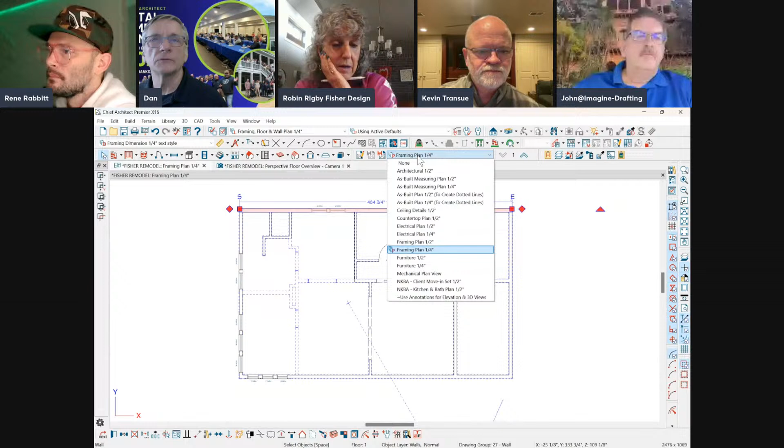So you must have your walls turned on here in this view. So if we look at, here's your walls normal down here, right? Oh, they're turned on. If we go to the 1/2 inch one and we go to walls normal, let's see if they're turned on. Walls normal, they're turned on. Okay.

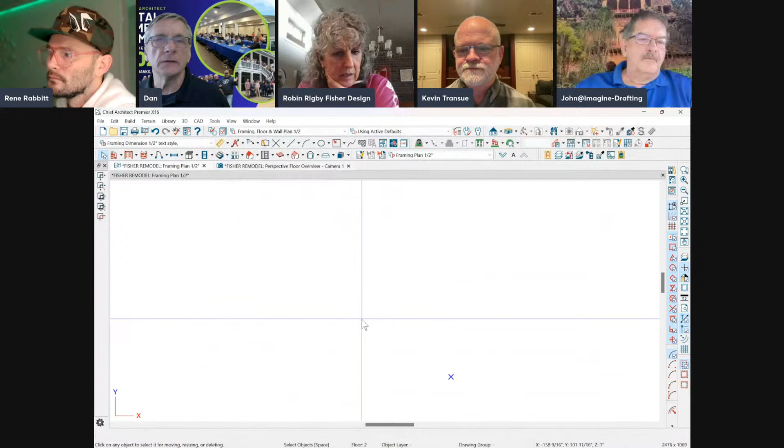It's got to have something to do with the layers, because we know they're in the plan. So something is shut off. It's probably wall layers. Let's look at that... that's not it. It's got to be one of those. Framing, I don't know, I see it. Did anybody else see it? No, what was it? What was it?

Go back to the half inch one. Yeah, there it is right there. What was it? You're in the attic on the half inch one, and you're on the first floor. Oh yeah, look at that. Oh my God, are you freaking kidding me?

See, I told you it was user error. So it was attic walls that were probably turned off. We were in the attic, and my layer was on the wrong floor, why? You probably saved your view when you were in the attic, so it keeps going back to that floor every time. I've had that happen before. People have asked what's going on. I'm hanging my head in shame, but thank you, that's how you learn. Thank you, Aaron, I appreciate the support.

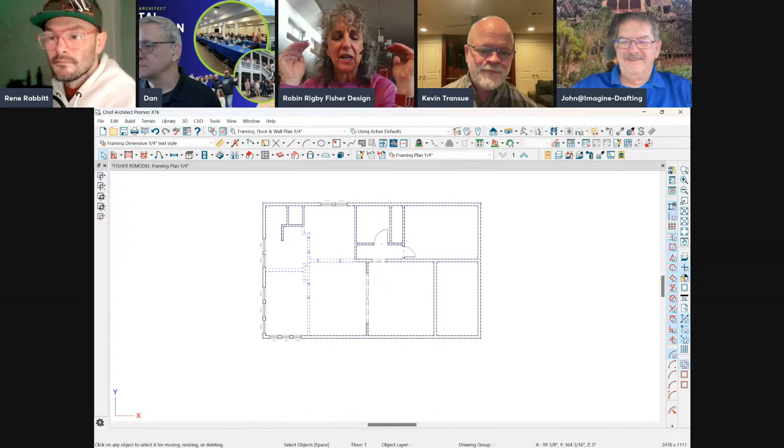You gotta love it when it's so. You guys, I do need to share this with you. I was working on a project for my students, trying to get a dormer in, and no matter how many times I tried, the roof was still there. I did it on one side of the house and it turned out perfectly, but the other side I could not do it. So I called Dan and said, I need you to help me. When I'm doing this, blah blah blah, oh my God, it's working. All I had to do was have Dan on the phone and it fixed itself.

That happens to my wife too. I don't know what I did, I don't know what was going on, but here's my favorite thing Dan tells me: if it's not working, turn it off, turn it back on, and it may work. That happened in class the other day. One of the guys was having something happen and it wasn't doing what you thought it should. So I said, turn Chief off and reopen it. Poof, it was there. There's a lot of truth to that. Sometimes Chief stores stuff in memory, the active memory on your RAM, and sometimes it just gets stuck. No explanation, it's just one of those things.

Thank you guys for helping me fix that. Thank you, no problem. Hi Nikki, how are you? Her favorite solution is to tell someone an issue she's having so it will magically resolve. That's so true. My wife will say, Dan, this isn't working, so I'll walk up next to her computer and touch it and then it works. I guess I do have that touch.

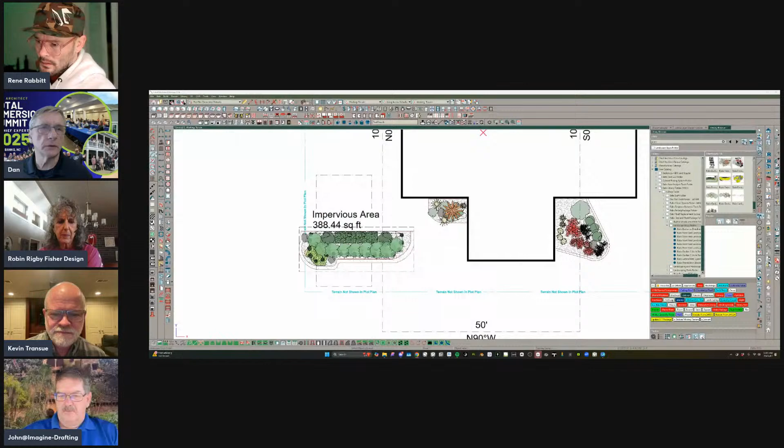Let me share my screen too, real quick Dan. Yeah, well you got yours, okay go for it. I'm just showing you this as an option. Let me get my Windows Explorer up here.

So in preferences, on any one of these folders or files, if you right click, this is for Dropbox but similar for Google Drive, OneDrive, Box, iCloud - most of them have this: make online only, make available offline. You want to make sure that your files you're working on are made available offline. This is a little different on OneDrive, but it's basically the same thing. Online only means it's pulling it off the cloud, and we have a shell representation of your folder. When Chief tries to access that, it causes problems.

This is different from the data location in Chief. You can go to your Dropbox settings down in the system tray - just right click on it, go to your Dropbox system, click on your picture there, and go to preferences.

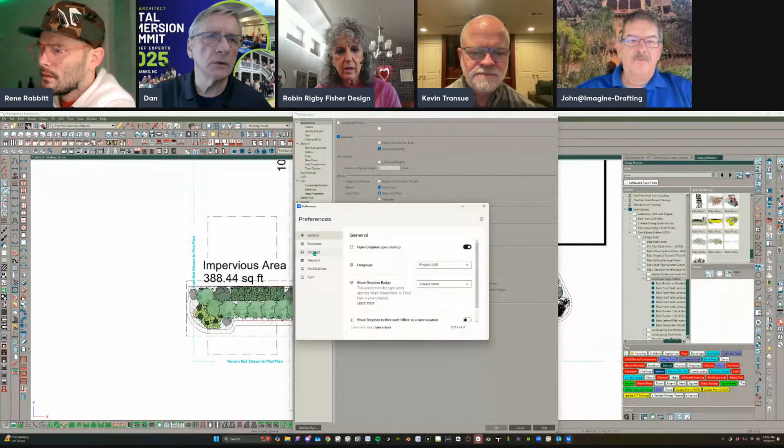If you have a laptop with a big Dropbox folder, you can specify to only store certain data folders on your laptop. The other thing you can do is selective sync. I use selective sync because I archive a lot of projects that I don't want taking up storage on my hard drive. If you need to make room but only need certain files on your desktop or laptop, use selective sync and only get the folders you need.

This is the same for OneDrive and Google Drive. They all have the same kind of option.

It might be called a little different, but for me, I make sure my data folder itself is on Dropbox. I don't care so much about losing a little file here since Dropbox has version history. But I make sure my library folder is off of any cloud-based storage, because that's my most valuable thing. I keep this offline and periodically back it up. So that's the difference.

If you do lose data, you can always go to that project or your data and you almost always have the ability to see a particular file. Unlike Rene, I do store my user library in the cloud, so when I open any of my other computers, my user library is the same on all of them.

I heard that you shouldn't save it on OneDrive, or I'm not supposed to. I don't know who told me that. I thought it was you, Rene, who said to put your data drive on OneDrive. Not the user data library.

If you do lose a file, all of these services have version history. I can go into version history, and it will bring up Dropbox Online, where I might have the option to pick a previous version. That's really important if we're trying to recover data.

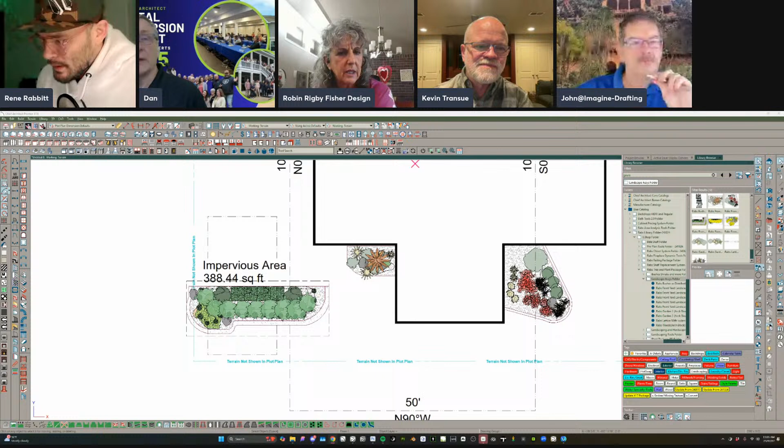Can you save it to two different drives? I have two G drives, one for the college and one for personal use. Can you save to two drives or not at all? That's not an option — it's only one drive. You can't have it save to both. I'm sure there's a way to do it, but Dropbox does not allow symbolic links, while OneDrive, I think, still does, so yes, technically you could.

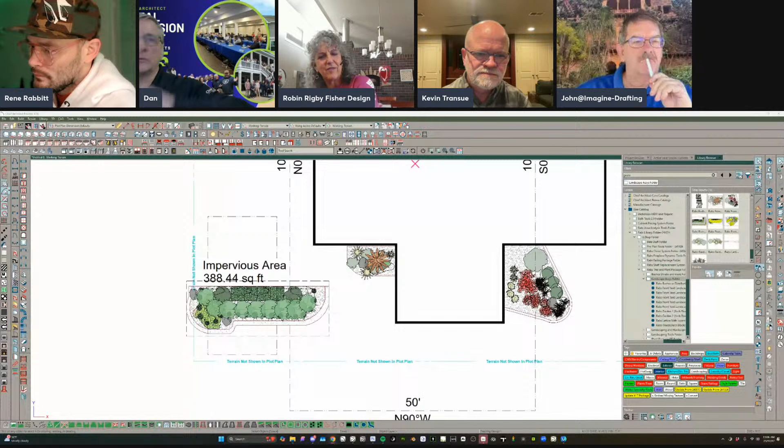If you have questions, let us know. Hey, are you going to Summit, KBIS? I am. I'm up for a big award at KBIS, so if you're going to be there, come find me.

My grandson is going to come say hi. You guys are in the presence of greatness here. Say hi to everybody. Hi, nice to see you. All right, see you guys later. Bye, take care, bye.